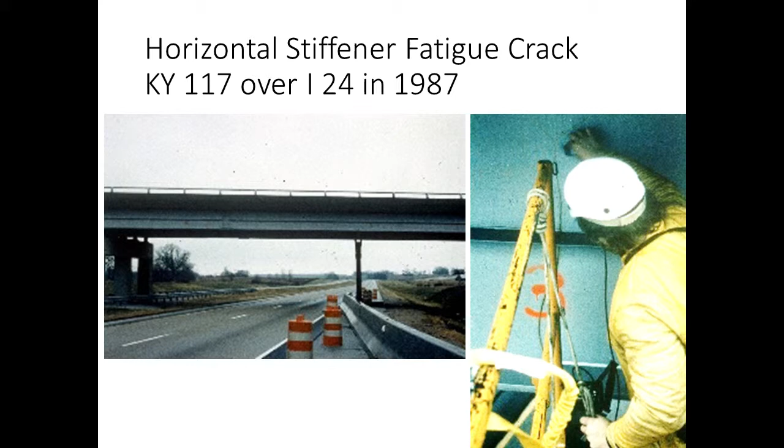In the fabrication shop, to form a sufficiently long stiffener, what they would do is take two pieces of bar stock, butt them up together, and then put a weld on the top and a weld on the bottom, then weld those to the web of the girder. Then the girder would be put in service, and problems ensued.

In a fatigue situation, as a result of the welding process, we don't get a complete penetration weld, and we have this area where the pieces of bar stock aren't completely welded together. This little area acts as a crack starter in a fatigue loading environment.

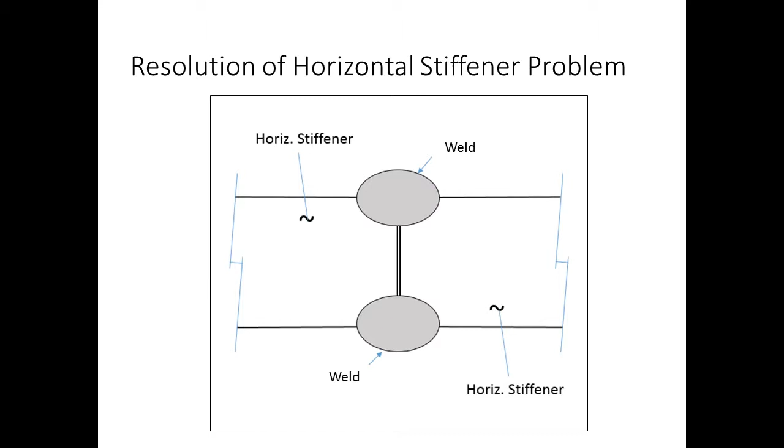Now, the inspectors knew they could find these cases, but they were concerned about the welds out there where a crack hadn't nucleated yet. They had a problem finding these butt welds in the stiffeners because the fab shop ground the reinforcement flush. So to deal with this, they shot down the stiffener with ultrasonic shear wave testing, and they were able to readily identify the incomplete penetration welds.

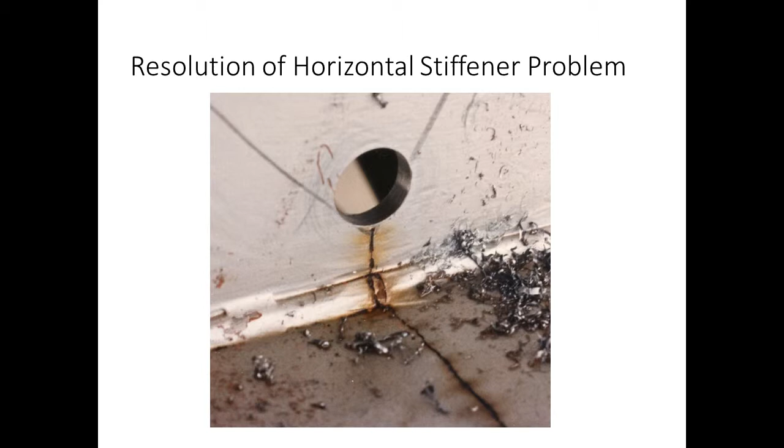And when they did, they preemptively put check holes above and below those locations so any cracks that developed wouldn't jump into the web.

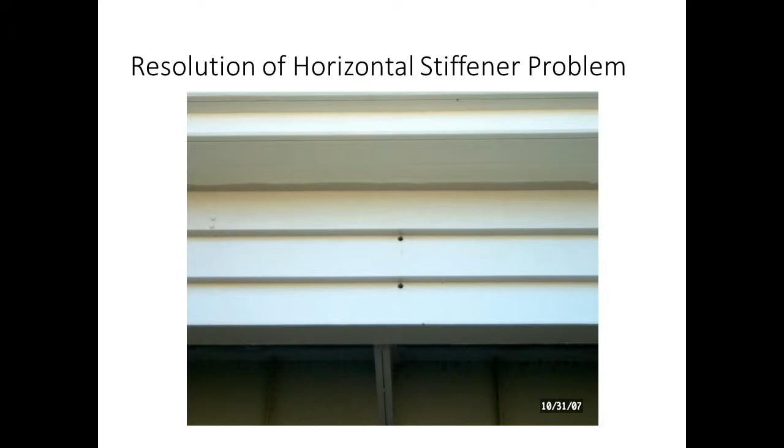When I started looking at these cases, I thought, let's describe the activities as a process, and we came up with these four steps. The first step for a highway agency is to identify a problem or concern, then determine an effective non-destructive method or methods, develop a remedial action, and apply steps 2 and 3 to all pertinent bridges and structural members. If they missed one, there's a likelihood that a crack would develop and jump into the web of a girder.

Now we can go back another 20 years, to the Silver Bridge at Point Pleasant, West Virginia. It spans the Ohio River between West Virginia and Ohio. The bridge was completed in 1928.

It has a main span about 700 feet. It's an eyebar suspension structure, and one of the novel features of it was the fact that the eyebar chains formed part of the upper chord of the truss.

But the bridge had several problematic features. The eyebar chains were fracture critical. They were made of a high-strength, low-toughness material. And then the towers were rocker towers, so if one of the chains failed, the tower would become unstable and it could collapse.

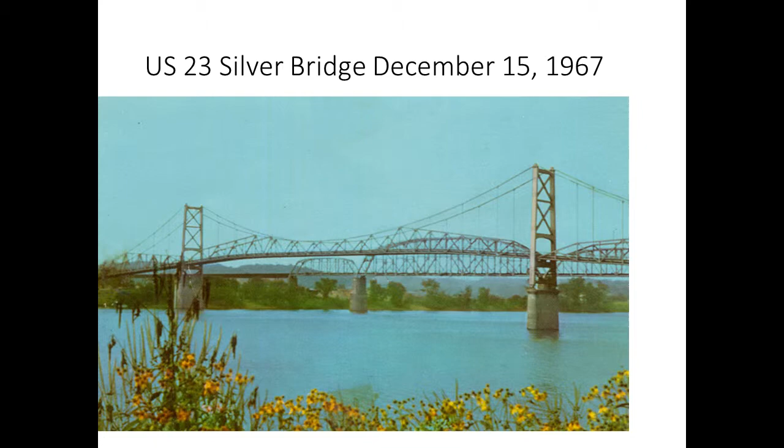And unfortunately, that's what happened. On December 15, 1967, we had the worst bridge disaster in the history of the U.S. 46 people were killed. Of course, there was a lot of public outcry, and there was a detailed investigation of the accident.

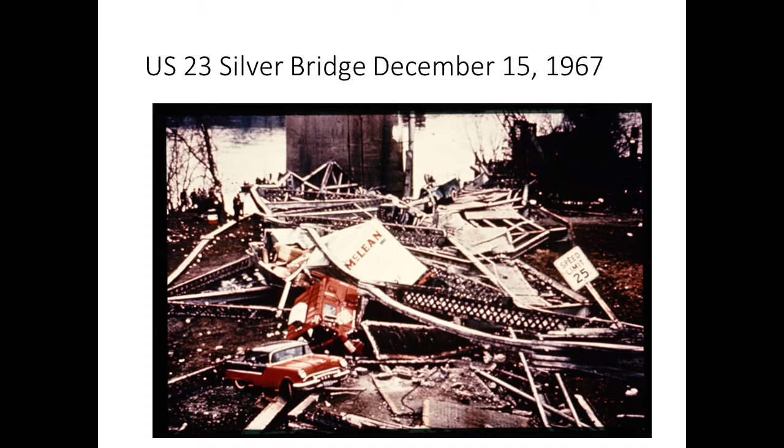This was sent to the National Bureau of Standards, and they did failure analysis on the bridge, and they determined that the initial crack was caused by corrosion cracking, and it ran in brittle fracture across the leg of the eyebar head there. The other thing they found was the crack size was very small, only like 3 to 4 millimeters. And the Bureau of Standards came out and said that there was no known non-destructive evaluation method that could be used to detect this crack.

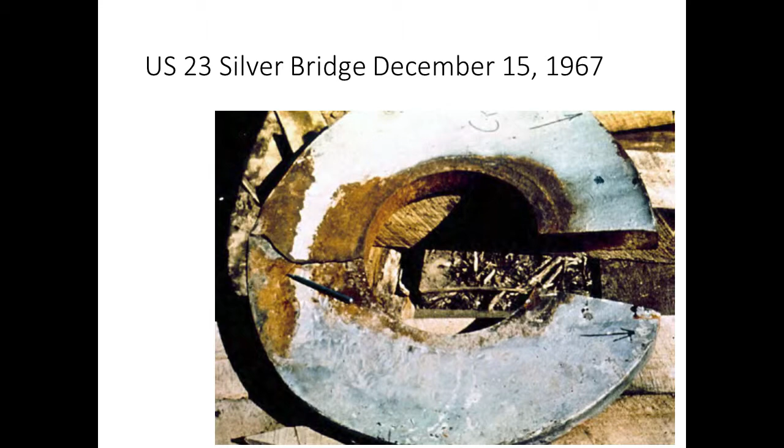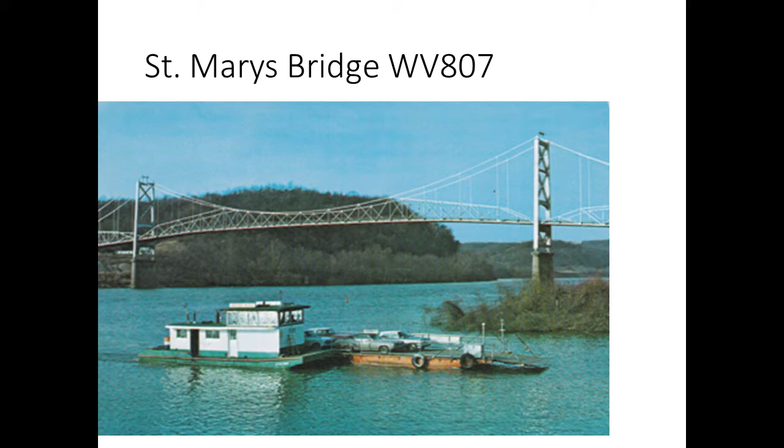This bridge was kept out of service until a decision was made to dismantle it in 1971.

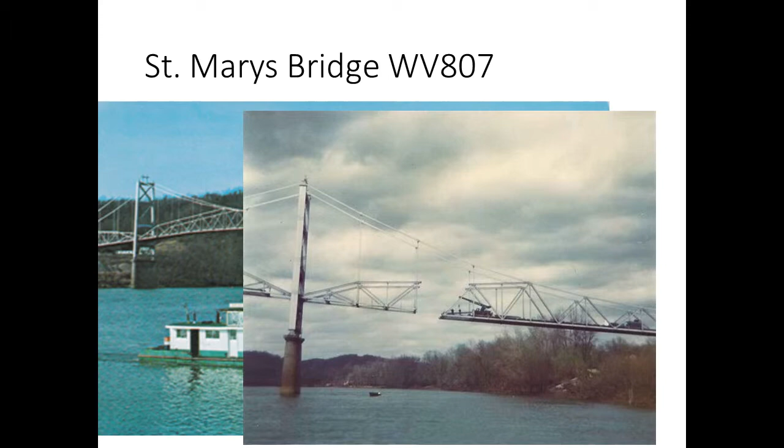But unlike the St. Mary's Bridge, this bridge was kept in service an additional 15 years after the collapse of the Silver Bridge. Then it was closed to full vehicular traffic and opened periodically to pedestrians before it was completely shut down in 1991. And this bridge is still standing today.

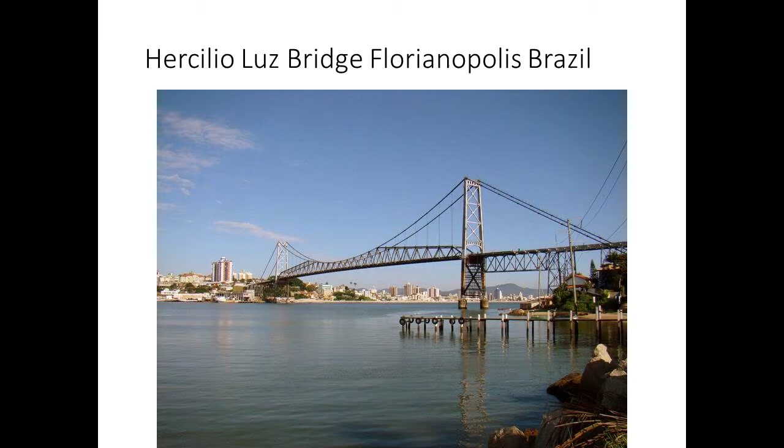Now, in these cases, of course, we've obviously got a concern given the collapse of the Silver Bridge, but we don't have an effective non-destructive evaluation method due to the size and issues with the eyebar chains. There's not really a practical remedial action, so there's no repair that can be performed to safeguard the bridges.

So we really get the end point of bridge preservation, either keep it in service or replace it. The Brazilians decided to keep their bridge in service, and West Virginia took the St. Mary's Bridge out of service.

Moving a little bit closer to the present, this is the I-794 bridge, Hoan Bridge. It's in Milwaukee, Wisconsin. The main span's an arch structure. This is one of the approach spans, about 200 feet long, supported by 3 10-foot deep girders.

And I believe it was under a heavy load in December of 2000. 2 of the girders fractured almost completely. Wisconsin DOT shut the bridge down and replaced the span. And thereafter, there was an investigation.

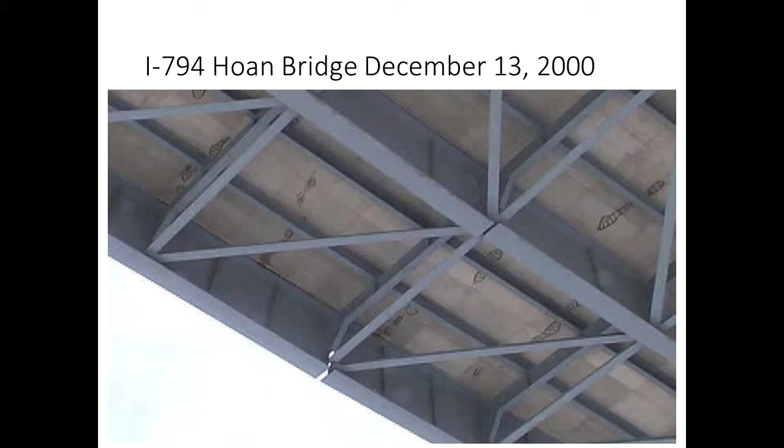Now, we can see here, this is a problem area. You can see we've got a vertical stiffener there and a horizontal gusset or shelf plate. And you can see the shelf plate's notched out to accommodate the vertical stiffener.

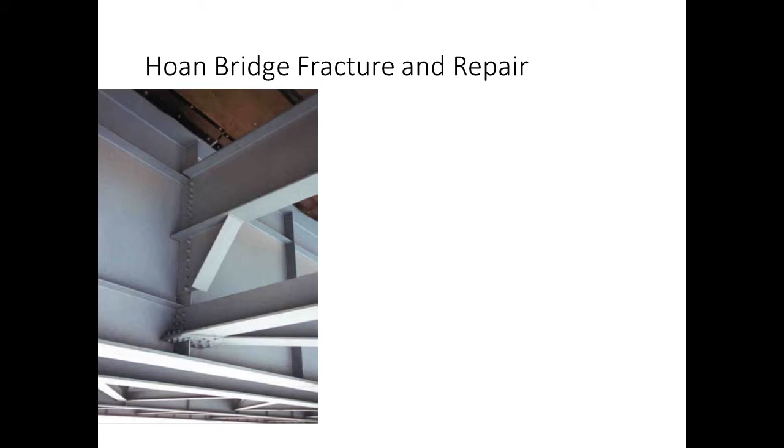Apologize, this picture's out of focus, but it's the best one I could find. You can see we're looking end on at the vertical stiffener here. You can see the fillet weld on one side that attaches the stiffener to the web of the girder. And then we see the shelf plate there, it's got a weld there. And you can see that the 2 welds are in close proximity.

Well, the investigators concluded that these welds created a condition of triaxial constraint and high stresses, so when they had a small pop-in crack, it became unstable and ran up and down the girders, causing the fractures.

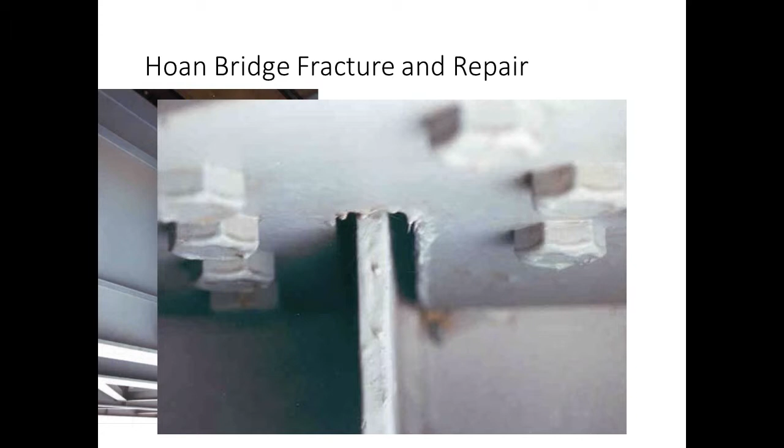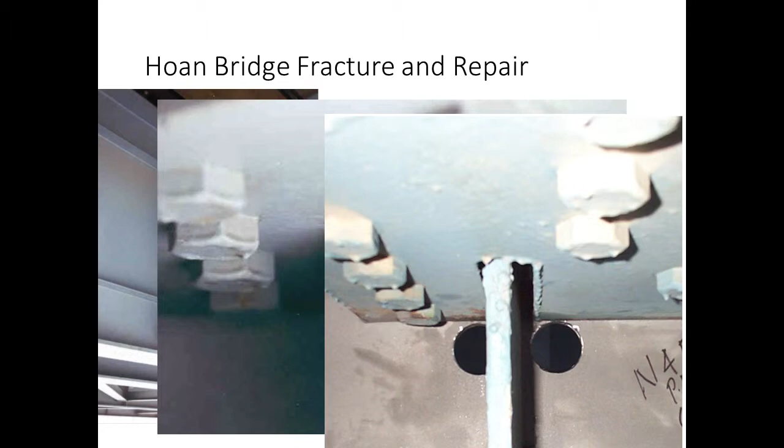So Wisconsin DOT came in and did some rehabilitation by putting check holes below and above the shelf plate, so any cracks that occurred in this high stress area would be arrested before causing problems.

Now, if we look at our process here, we have a problem, not a concern. We don't have an effective non-destructive evaluation method again, but we do have a remedial action, and it can be applied. If you see this particular detail on a fracture critical or maybe a 3-girder bridge, probably want to go in and do that retrofit.

And in Kentucky, we have a number of bridges that have that particular type of detail. They call it the Hoan detail. But all the bridges are redundant, and we've never had any fracture problems. So at this point, there hasn't been a need to do any retrofit.

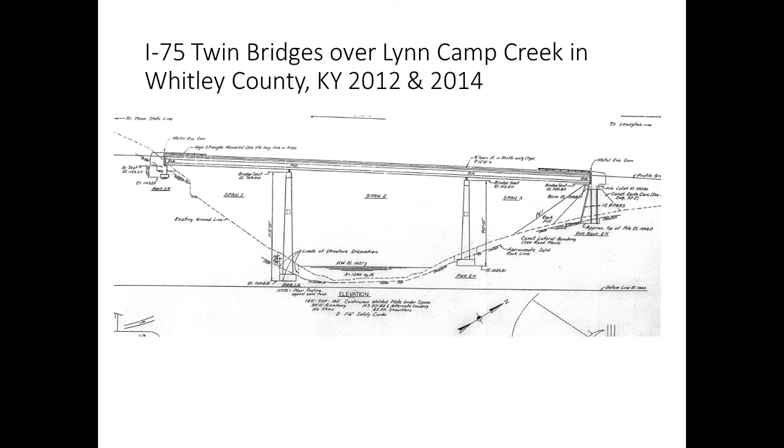The bridges were made out of ASTM A36 steel. They were constructed somewhere around the late 1960s, early 1970s.

And in 2012, both the north and southbound bridges experienced single fractures, seen here. You can see we've got the vertical stiffener, and then we've got the horizontal stiffener, and we have this narrow gap area there where the welds intersect, giving us that high constraint. See the cracks run up and down below the horizontal stiffener. So our suspect area for crack initiation would be right in here.

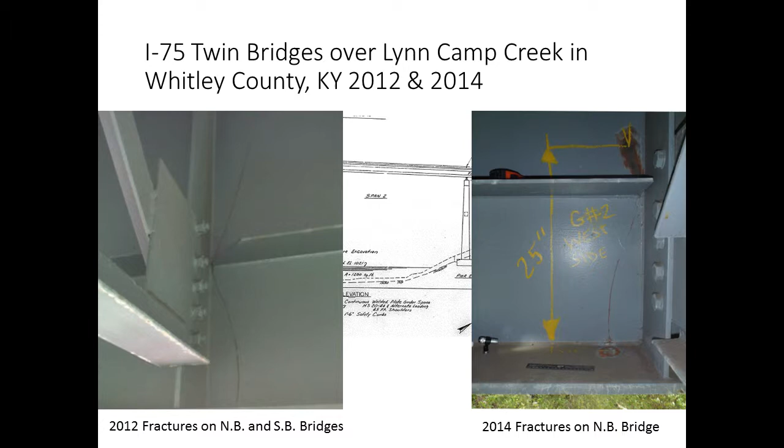The cabinet repaired those and went on. And two years later, in 2014, they had two similar failures on a single girder line on the northbound bridge. In this case, you can see the crack growing up, going down, and it's jumped into the lower flange. The cabinet was going to do a repair on this bridge, and we asked them, well, can you cut out this area and give it to us, and let's do some failure analysis on it.

So I took it to my failure analyst, and here's an optical picture. You can see here's the horizontal stiffener. There's the end of the fillet weld that's pretty gloppy. And here's the fracture surface in the web. Typically when you see chevron details like this, and there's some above that didn't show up here, they point back towards the source of the failure, which seems to be in this area, which meant the crack went this way, shown by the white arrows, and that way downward. So this was the area of concern.

We cut the specimen down and stuck it in a scanning electron microscope. In this particular area, these fractures were cleavage fractures indicative of brittle failure. But we have this thumbnail area of interest, and you can see they've got some horizontal lines across there, and these are termed ratcheting marks, and they're a sign of fatigue. When we amped up the magnification to about 1,000, we were able to detect fatigue striations. So this little thumbnail is our critical sized fatigue crack that caused the brittle fracture.

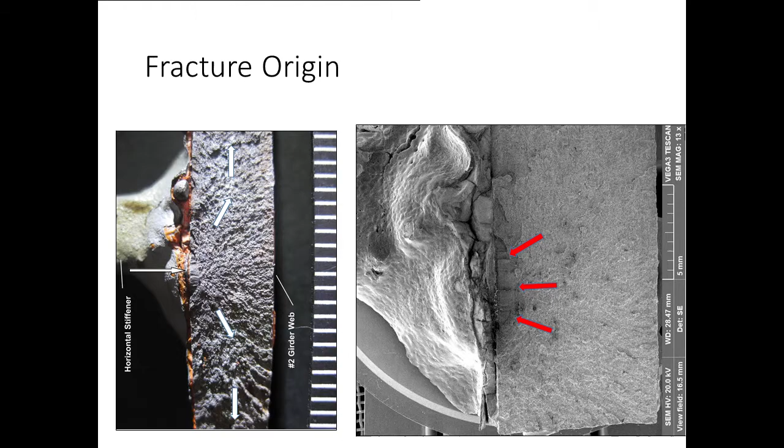It was about 4 millimeters long and about 1.5 millimeters deep. Despite its small size, we knew within an inch or two where the crack would occur, and we thought, well, we went to the cabinet and said, well, we can take a die grinder and clean this area up and come in with eddy current and detect it. And if you don't want to do that, you can put check holes above and below the horizontal stiffener. Again, we had a problem. We had what we thought was an effective non-destructive evaluation method, and we also had a remedial action.

What did the cabinet do? Well, the cabinet did neither. What they did do is they did frequent visual inspections of the problem areas, and then the Division of Maintenance sought to expedite replacement of these two bridges because they're six-laning I-75 near there, and they wanted to replace the bridges with up-to-date structures rather than do expensive repairs.

Our next bridge is going to be the I-64 Sherman Minton Bridge. We'll talk about the activities in 2010 probably through 2012. This is a tied arch bridge over the Ohio River between New Albany, Indiana and Louisville, Kentucky. It was one of the first bridges that had welded members out of T1 type steel, and they were used in these fracture critical tie chords here.

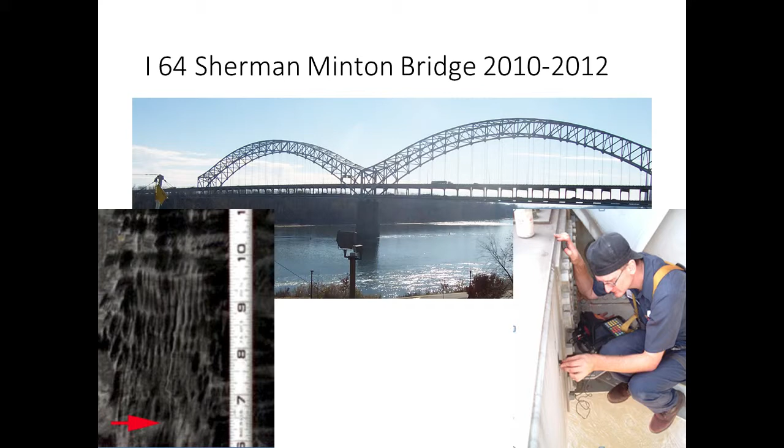As time went along, the Indiana DOT had some additional concerns, and they determined they were going to perform non-destructive testing and evaluation of the box girders for that problem and other issues. Here you can see a technician doing some inspection on one of these transition butt welds. This is a particular area that was being retrofit during the inspection process. What you have here is a shelf plate, and it's welded onto the inboard web of the tie chord, and you can see that it lapped over the top of this transition butt weld.

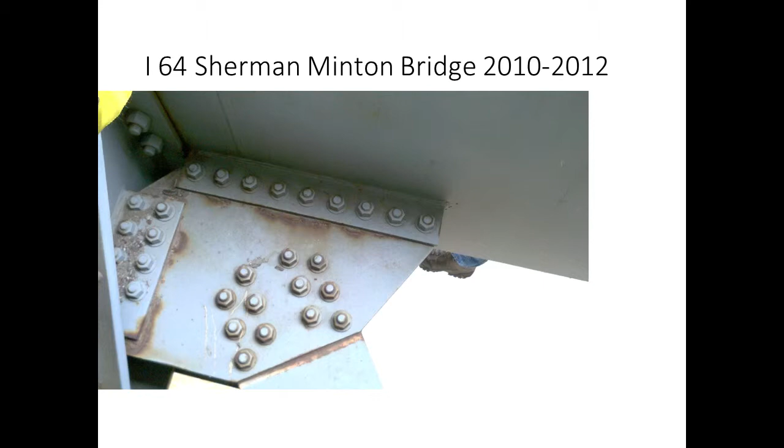They were cutting these out, and then they were replacing them with a bolted attachment. And we can go back to September 9th, 2011. I know where I was, and I know where David Steele was, because we were on the bridge. After they cut one of these loose, they found a small crack here, a surface breaking crack.

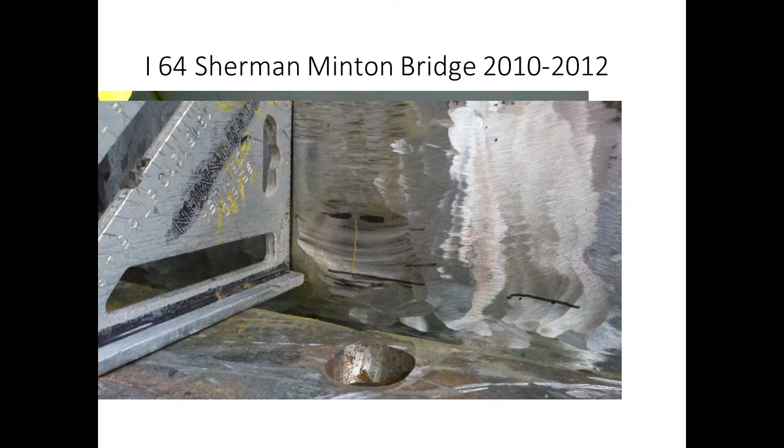They had a non-destructive testing technician come in, and he did ultrasonic shear wave testing and said that he found that the subsurface of the crack was about 2 inches long. That information got passed up the chain of command, and at some point the Indiana DOT decided to close the bridge to traffic right there.

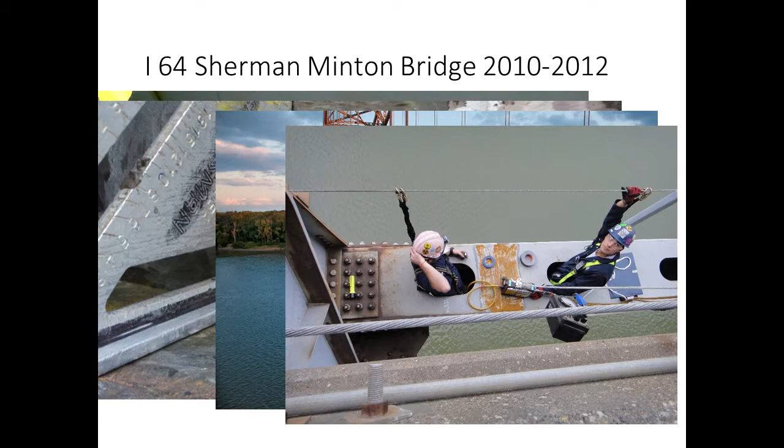And subsequently, there was a very intense, about month-long period of non-destructive evaluation to finish up inspecting all of these tie chords. And subsequently, the Indiana DOT came up with, there was a multi-state team. They came up with a retrofit that was applied, and the bridge was put back in service in February 2012.

Our next bridge here is the I-65 JFK Memorial Bridge. It was built in 1963, about 4 miles east of the Sherman Minton Bridge. It crosses the Ohio River between Jeffersonville, Indiana, and Louisville, Kentucky. It's a cantilever truss.

It has several fracture critical elements, including this upper chord that's made of the high-strength welded T1 steel. And they had detected cracks on the bridge.

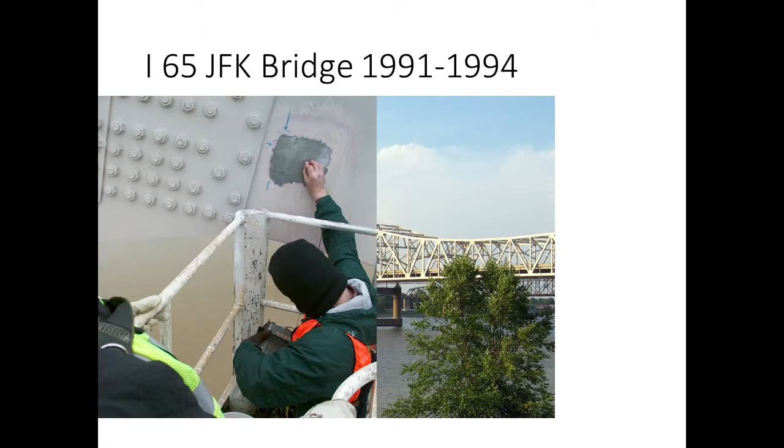Starting about 1990, 1991, there was some non-destructive testing performed. In this particular example, this is the upper chord. They found a large crack.

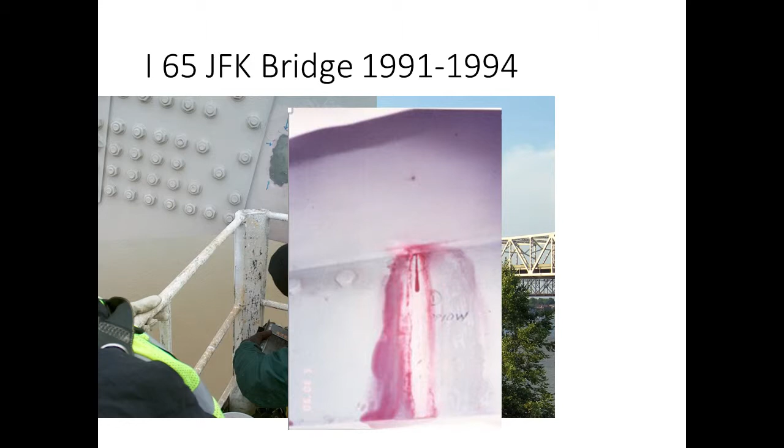You can see it's highlighted with magnetic particle, or dye-penetrant, excuse me. This was in a flange of an H-beam in the upper chord.

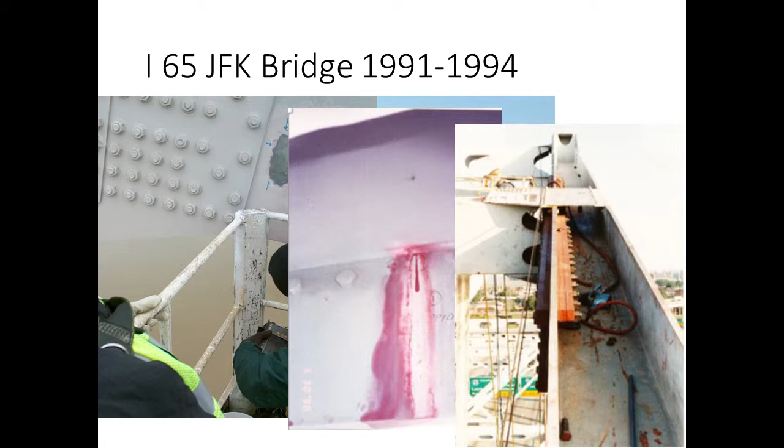It was subsequently repaired with a bolted splice. Thereafter, there was more ongoing non-destructive evaluation, and I think sometime in 1994 there were significant repairs throughout both trusses. I think there were about 90 cracks repaired at 35 of these transition welds using a variety of methods.

I just want to contrast the two bridges. The first area where we see some difference is the identification of the problem or concern.

Indiana DOT was concerned that with an existing crack, temperature would drop, fracture toughness would drop, and the crack would become unstable and the tie chord would fracture. They modeled the critical crack size using fracture mechanics, and were planning—there were discussions to close the bridge down sometime when the weather got colder.

On the Kentucky Bridge, the consultant cored a lot of the crack areas, sent the cores to a pretty prominent metallurgist, and he provided a report that gave them guidance moving forward.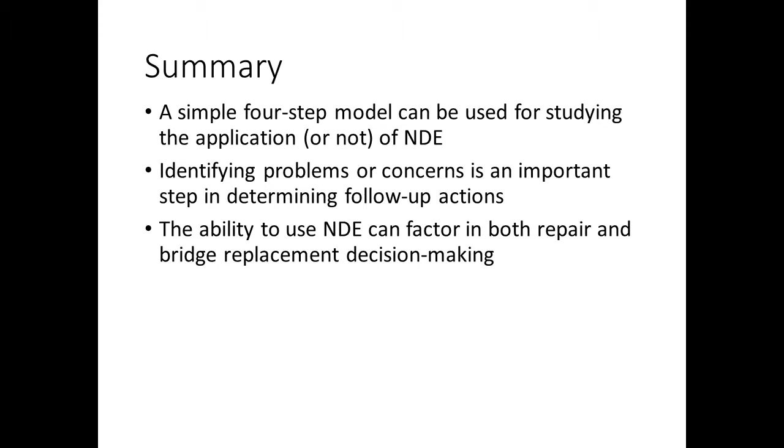And the last point would be that the ability to use non-destructive evaluation can be a factor in both repair and bridge replacement decision making. After that, I'd like to thank you and be willing to take any questions.